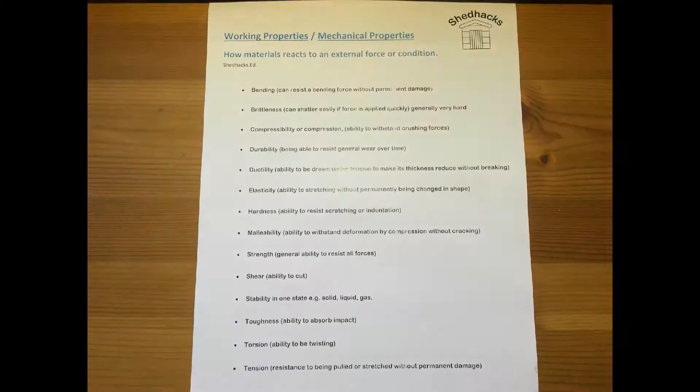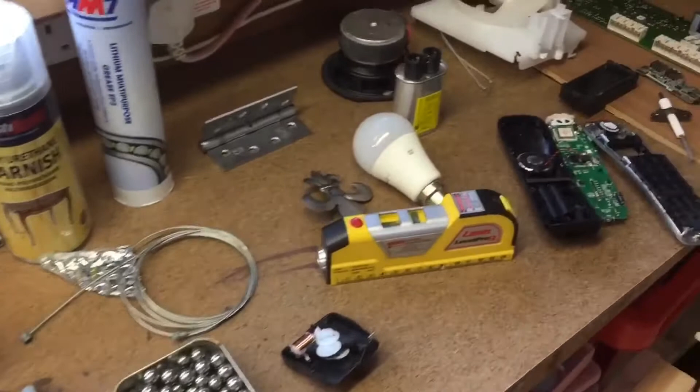In this clip we're going to be looking at these sorts of materials, and you can see a massive range of different types. Jake's going to be cutting a golf ball, melting some metal, blowing up some inner tube tyres, and melting an ice cube with fire, making custard to show you what that material is actually related to.

He's also going to be making fire from the sun, apparently, and changing the colour of plastic using UV light from the sun. On the table here, Shed Hackers, you can see some of the materials we're going to discuss in this next clip, and they're not as obvious in terms of their properties as you might imagine.

Jake, how's the golf ball cutting going? Yeah, it seems to be going all right. Oh, look, that's it. Okay, well let's have a look at it. Well, it's in two pieces now.

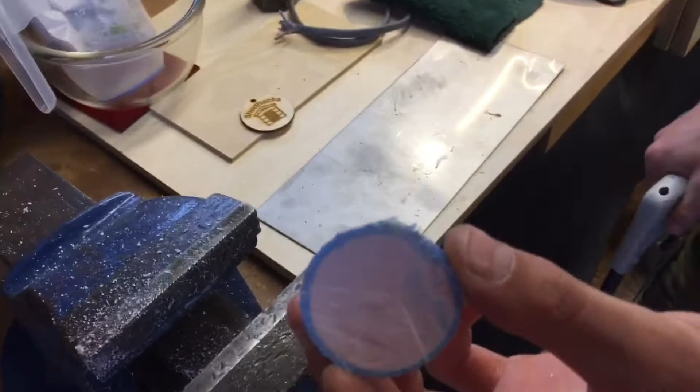Let's have a look. Do you know, years ago they used to be full of rubber bands all combined together, rolled together. And that is just a pure polymer by the looks of things. Well, there you go, Shed Hackers, that was a golf ball - just turn it, yeah, that definitely was.

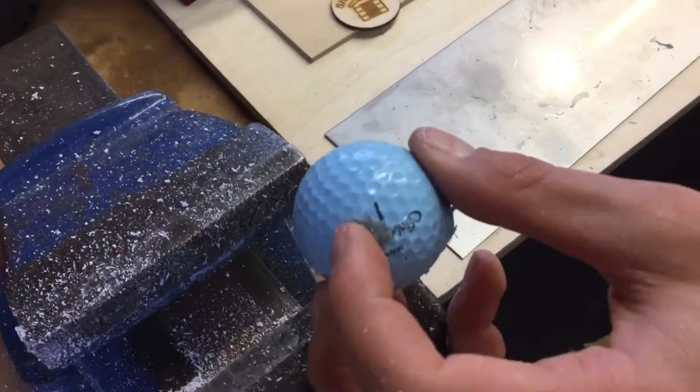Well done, Jake. Was that hard work? Yeah, it was actually. That has to take a lot of force, a lot of impact force, doesn't it? And some of the really new ones, the expensive ones, have a soft core and a harder outer shell so they can take perhaps even more impact and go further. Brilliant, that, Jake, well done.

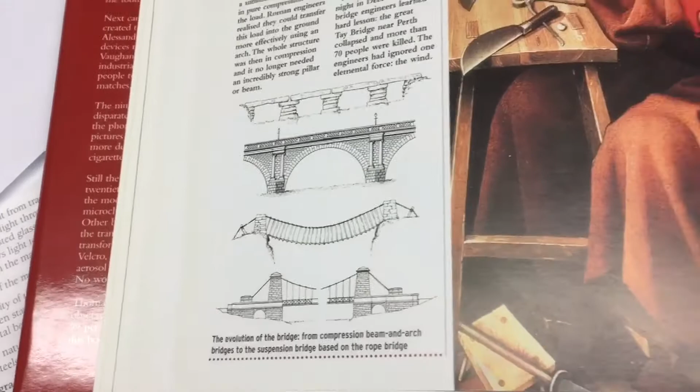How impressive. And these aqueducts here that hold water are all made from stone, but stone very carefully chosen. This page talks about how stone masonry was developed over years to make bridges, and how carpenters made things very finely using fine-edged steel and iron tools. Wasn't Jesus a carpenter? Jesus certainly was a carpenter, yes, and it makes quite a few references to that in the Bible.

But even the use of fabric has changed over the years. Looking at just the last 50 years, fabric has become quite an impressive piece of technology in itself - self-illuminating, able to insulate from heat, able to keep you very, very warm. All things that 100 years ago were virtually impossible.

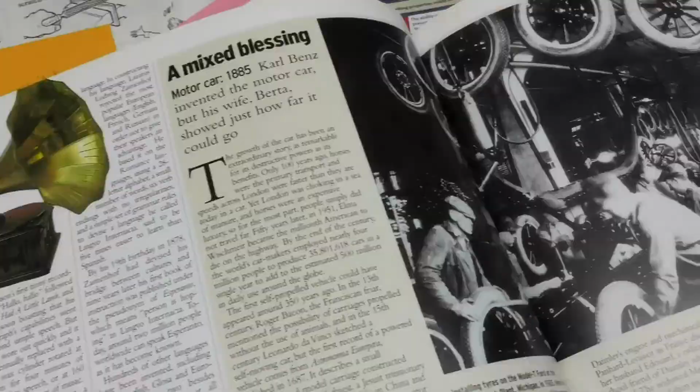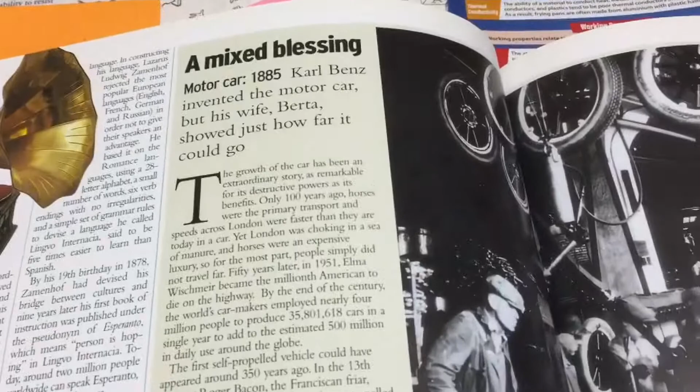Here's another interesting clip - look at the old gramophone here, that old record player. Wow, mechanical, a wind-up one, and it amplified the signal from a little needle or stylus into the cone, which amplifies the sound. And moving on a little, look at this motor car developed by Karl Benz back in 1885 - look at the old materials used, incredible. All these old technologies and old use of materials develop over the years into newer, more refined and more useful materials.

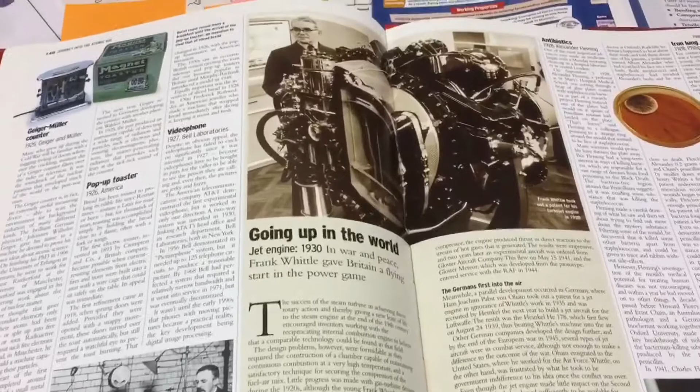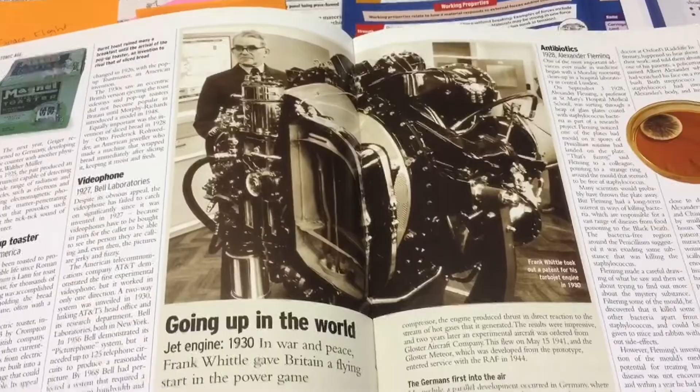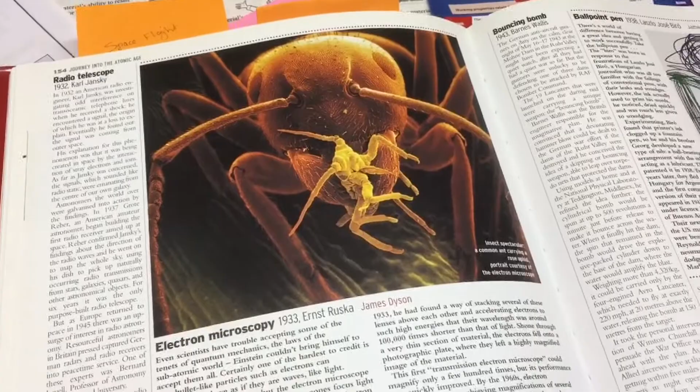And it helped enormously in the Second World War. Interestingly, this book's all about it actually. I've got some other images - I think there's one of the engine.

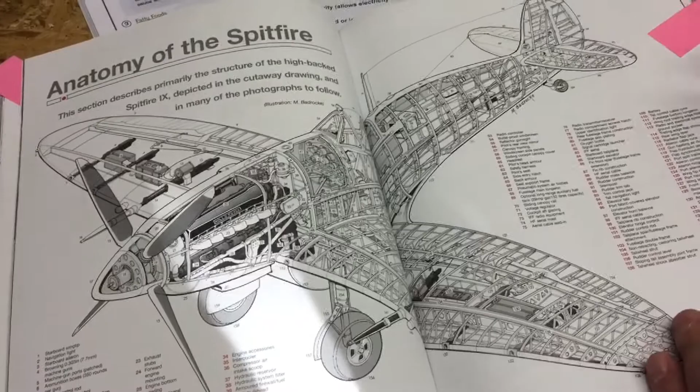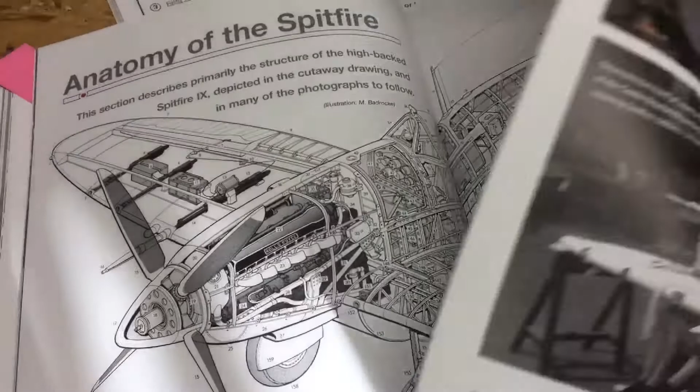Oh, there's the anatomy, they call it, of the aircraft. It shows all the various components, componentry, and the actual aeronautics, the airframe as well, how it's all put together. Amazing, isn't it? And then here it shows it being fabricated, made together.

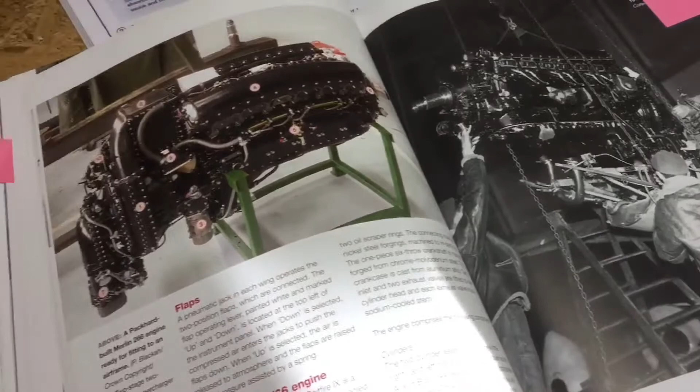And they actually did use fabric on some of these aircraft, not just metals. But wouldn't the fabric burn under the intense heat? No, it's treated - a lot of it was treated very carefully with chemicals. All part of this whole topic, really, this clip. Some of the materials they used were designed specifically to resist heat.

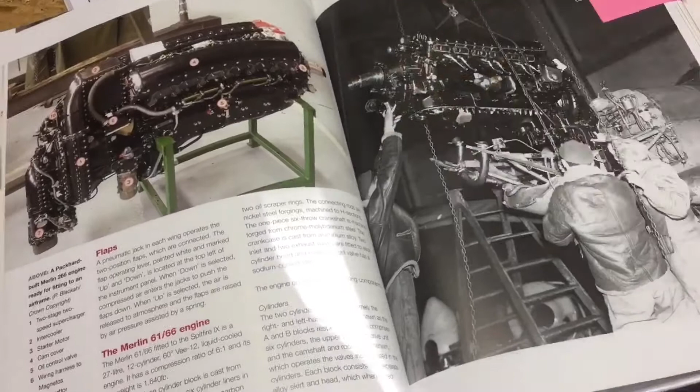And so has electronics. We're going to talk about electronic components a bit later in one of the clips, and how they've helped us in all sorts of ways, medical science in particular.

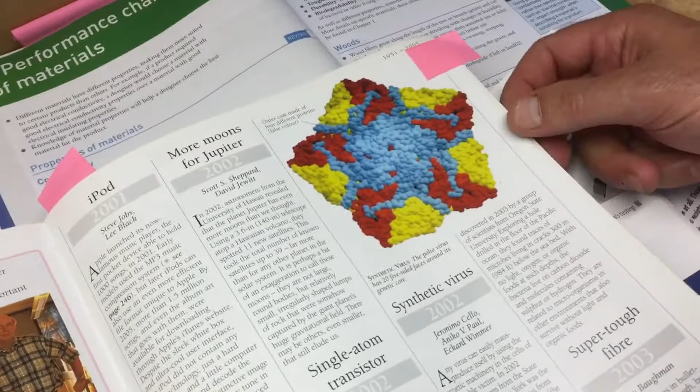Wow. Ah, yeah, genetic control. He's talked about genetic control and engineering. Very impressive. And one thing I did find out, look - this is interesting, this is at a microscopic level. That means you can't see it at all. This is the outer coating made from 4 different proteins, and they're man-made. It's a synthetic virus they've made here to counteract polio.

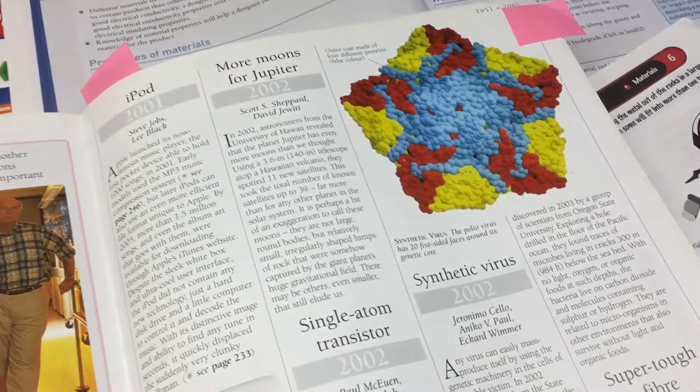That means to stop polio happening. So would they make a virus to stop another virus? They can do. And of course we're in a situation at the moment where there's viruses we really don't know enough about to stop it becoming very, very dangerous to the world. Go back to that though later perhaps.

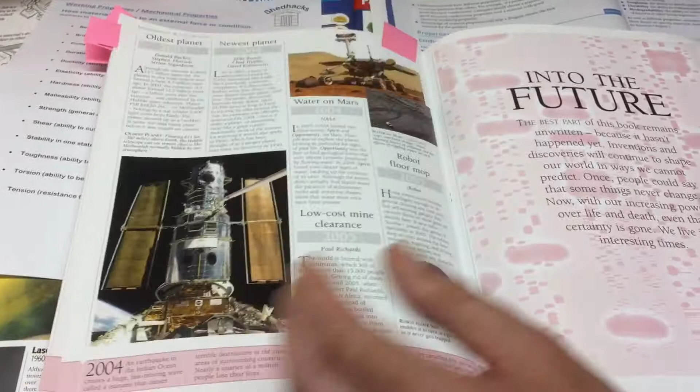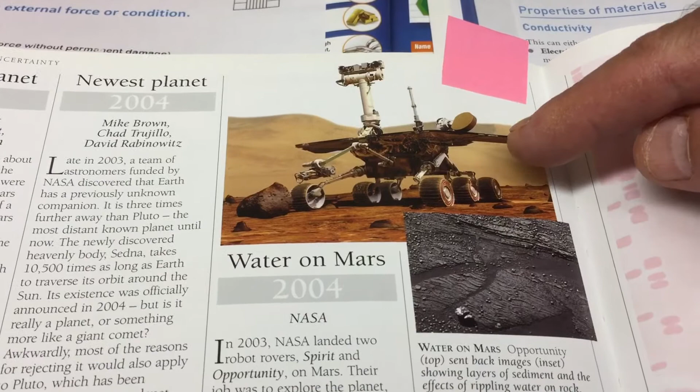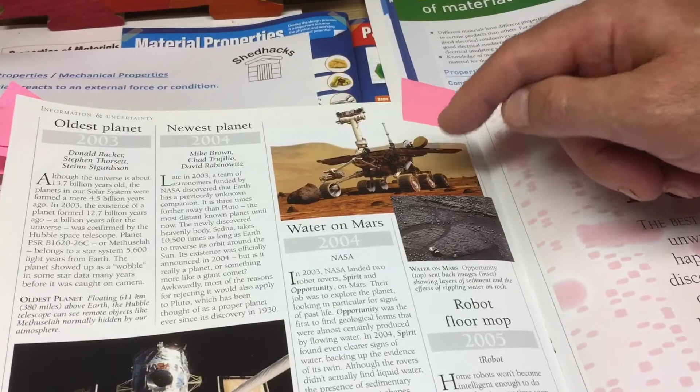Oh, there's this clip here on the Mars rover. Now that's full of very, very advanced materials. And the material science in that is something perhaps we'll touch on a bit later, but the resistance to wear and corrosion and temperature and chemicals in some of the materials used there will be very, very impressive.

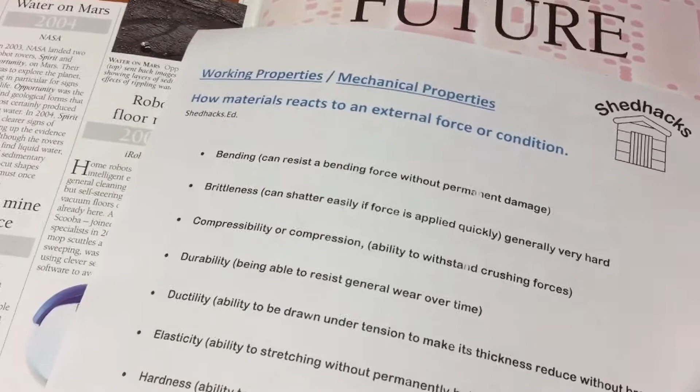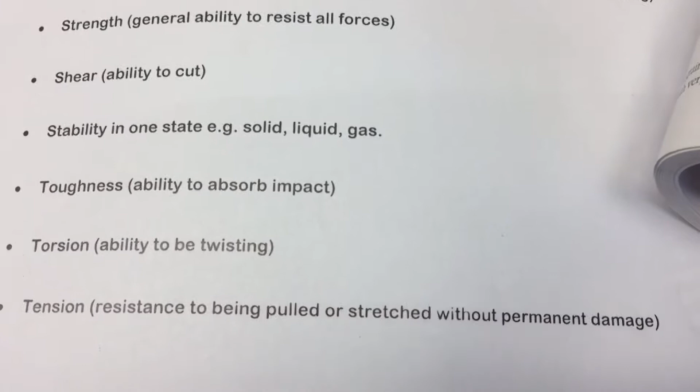Okay, we'll leave it there for a moment. When you talk about properties of materials, what do you mean? It's a good question, and I think a lot of people do find this subject quite difficult. I've printed off these worksheets and I've tried to write down what I've found from the various information and the research I've done. And here is a group of words I've tried to collect together to show the most common terms used.

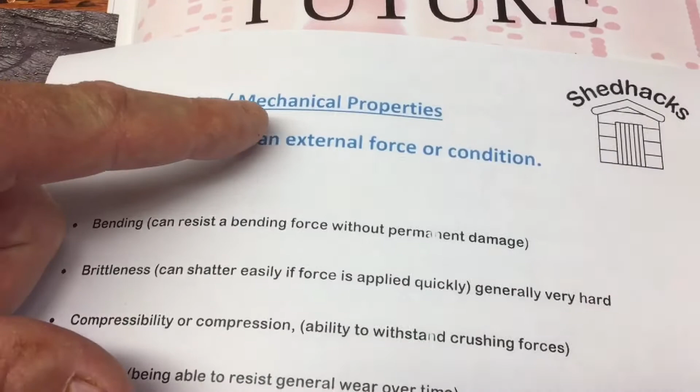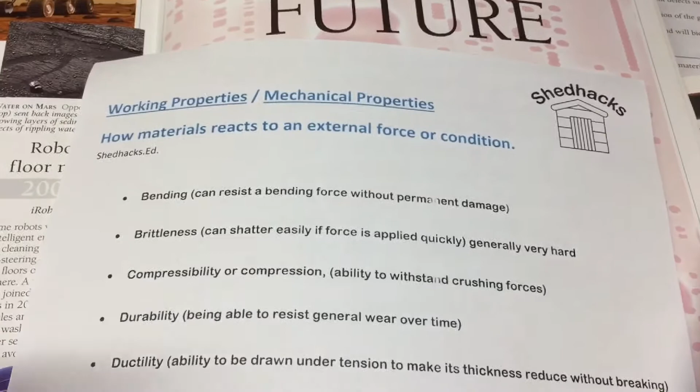And these are called working properties, and some people call them mechanical properties. What it basically means is how materials react to an external force or condition - I suppose in some ways to the environment they're in. And that's really critical about the design and use of certain materials.

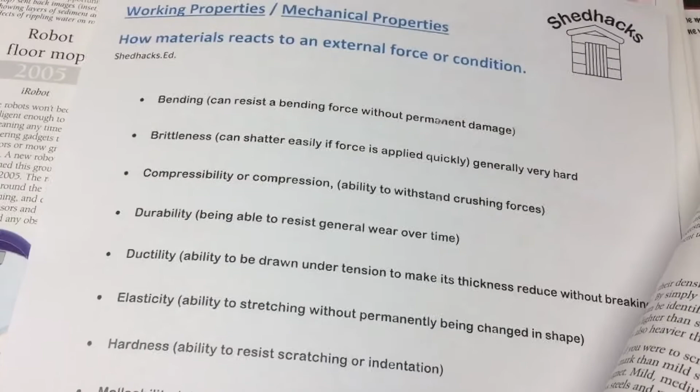Compression is a really interesting topic. Can you think of one piece of material that you know of that's really good in compression? It can take a lot of compression. Concrete?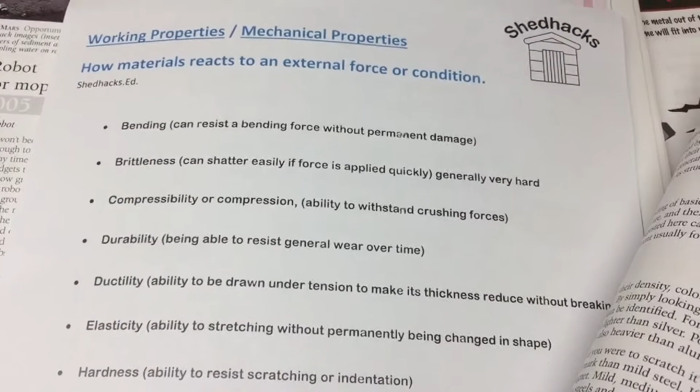Concrete is used extensively in house foundations and all sorts of structures, bridge structures, because it can take enormous amounts of crushing forces.

Moving on a little bit, durability is a general term, meaning resistance against wear over time.

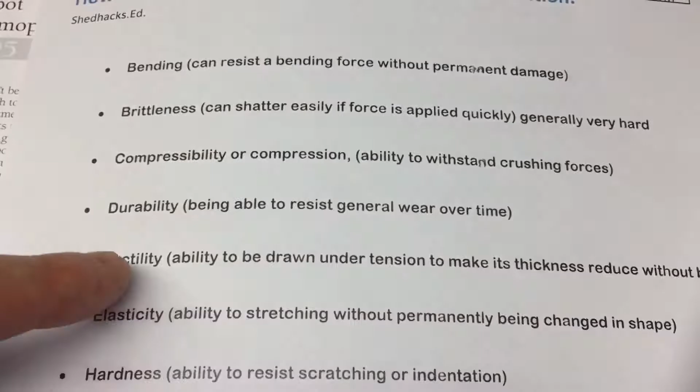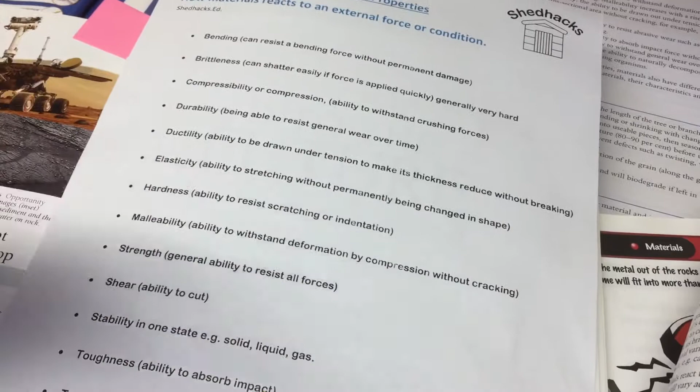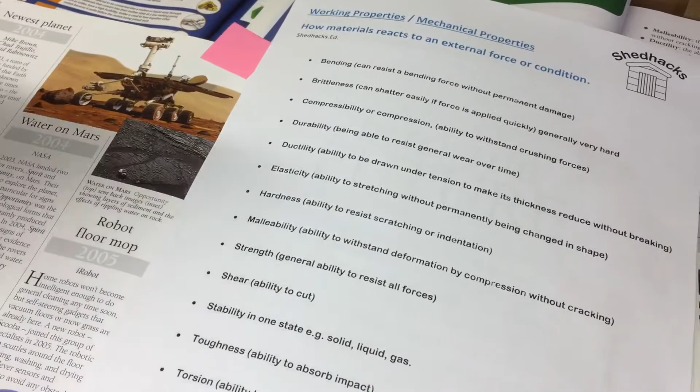So what's ductility? Ductility is the ability to be stretched and drawn under tension, when the thickness can still reduce, but it doesn't break. It's a hard one to explain, but with aluminium you can actually stretch it and it will become thinner, but it won't break until it gets to a certain point called its yield point. Perhaps we'll touch on that a bit later.

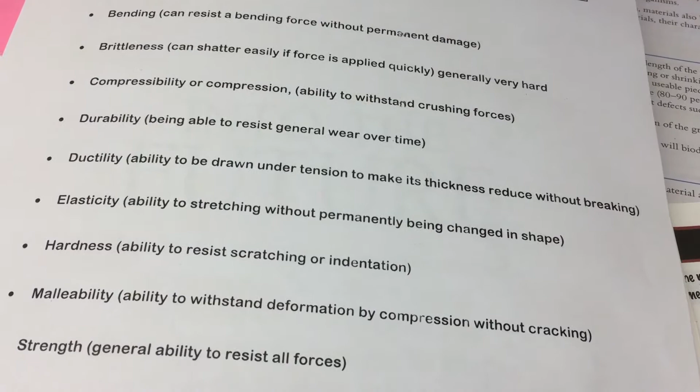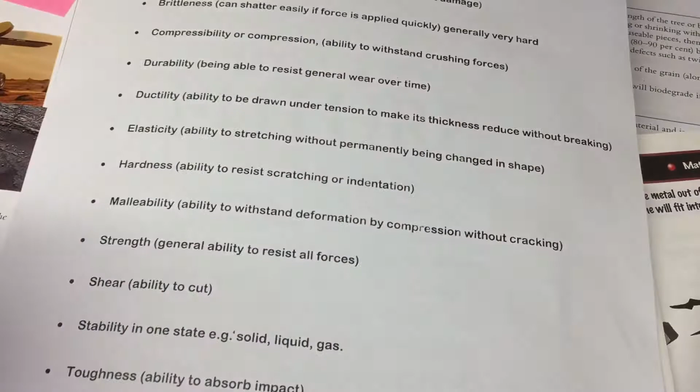Okay, and then elasticity, that's a little bit easier to explain. An elastic band is an example of elasticity, and anything which has the ability to stretch is known to be elastic in some way. It's connected with another word called plastic, which is also used in connection with elasticity - the ability to stretch without permanently changing its shape.

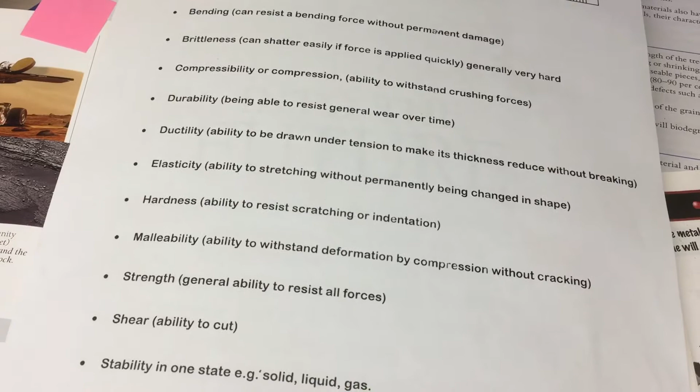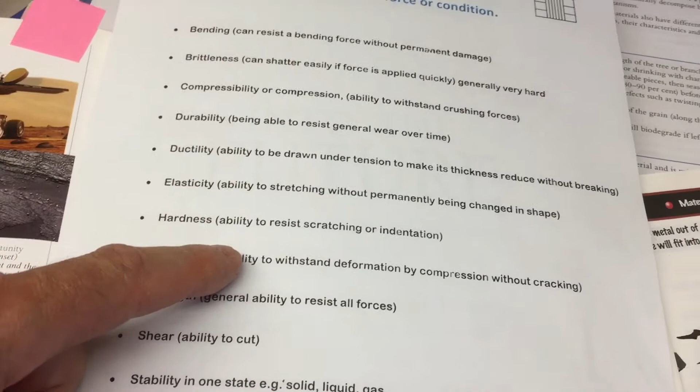So there you go, hardness. Can you explain hardness, Jake? Would it be the ability to resist scratching? Yeah, so if you try to scratch some metals and glass, they're so tough and resilient they don't scratch very easily, and that's a sign of hardness. The test for hardness often uses a very hard material such as a diamond, and they actually score it and see how easily it scratches or indents.

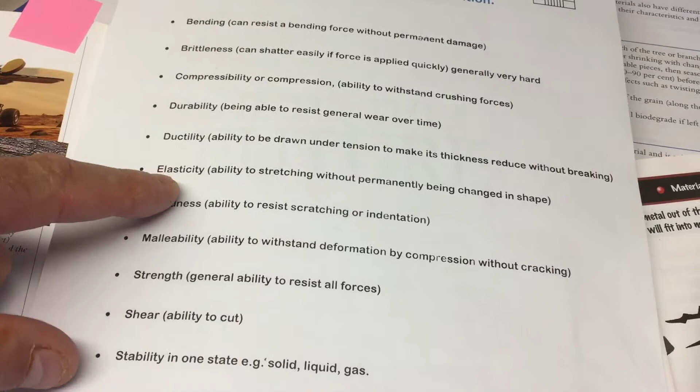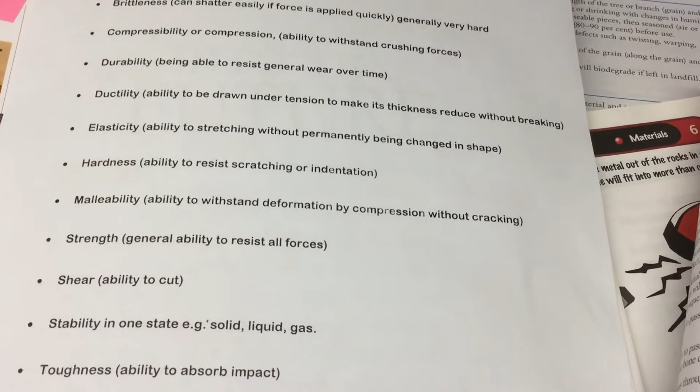Okay, that's hardness. Malleability is the ability to withstand deformation, or deformation by compression, without cracking. Another hard one to explain, and perhaps we'll touch on that a little bit later - that's malleability.

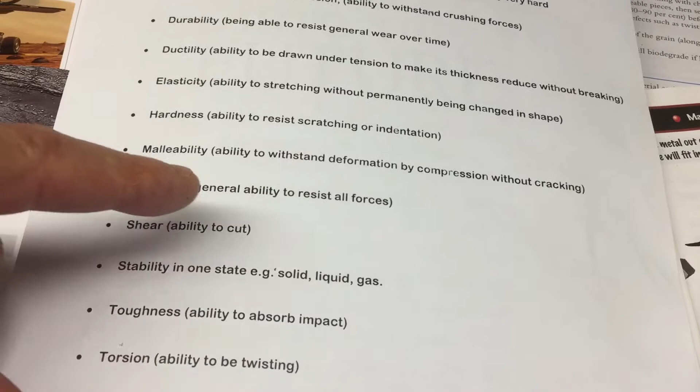Strength, a general point, is resistance to all sorts of forces, a little bit connected to toughness. So strength is a general term, okay.

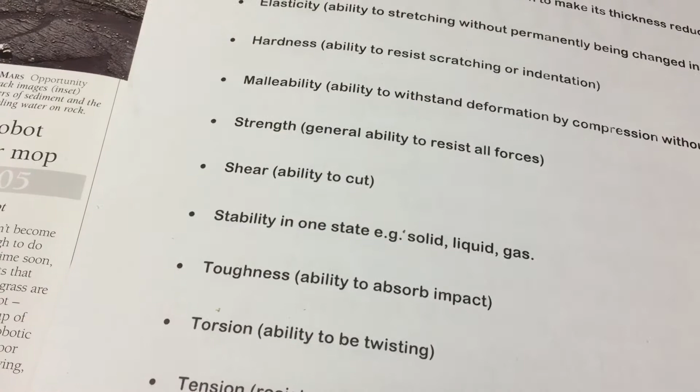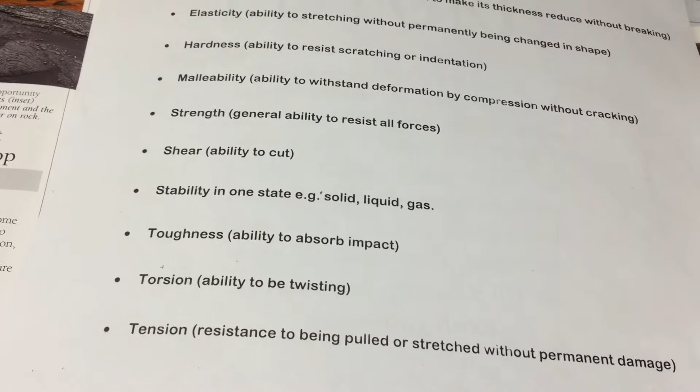Shear, well that's the ability to resist cutting. Paper is very poor in shear because you can cut it very easily, but you can't cut metal very easily, and you can't cut diamonds very easily. Shear is the ability for it to be easily cut.

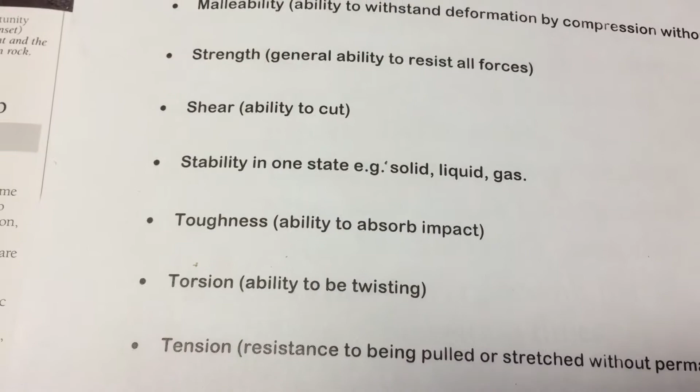Stability really relates to the product or material not changing from one state to another at a given temperature. Some materials are actually very unstable, and they can suddenly change to a liquid or a gas, even with just a couple of degrees change in temperature.

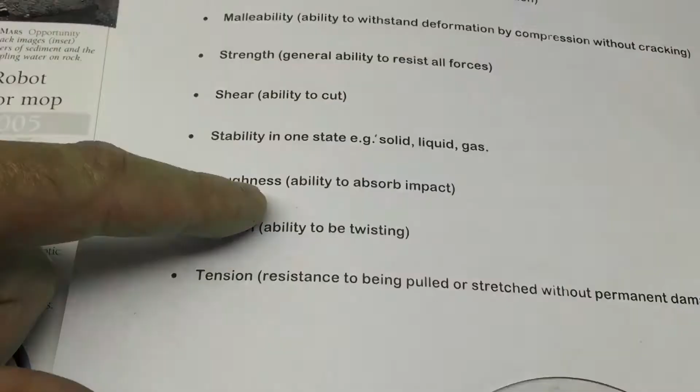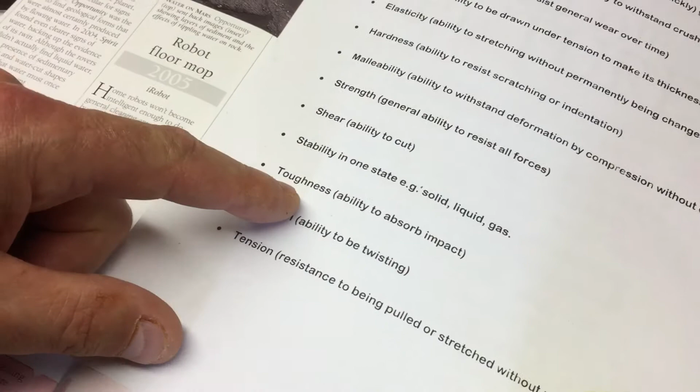Hi guys, and in today's clip we're going to be breaking some materials to test them for toughness and impact strength. So that was the end of the test, and we're going to take you through all the items we broke, and we're going to break one final product, not just one material. What do you think that's going to be, Jake? My phone! No, not your phone - it's an iPhone. So what's toughness? Toughness, there's the spelling, it's the ability to absorb impact.

So I suppose a tennis ball can do that - it can take impact time and time again, and it won't break or crack. So what about a spring? Yes, to a point. I'll give you an example of a spring. Here's a spring - it is tough, but it's not a really good example. If you stretch it, it will return back to its original shape. But if you stretch it to a certain point, the elastic limit if you like, it's called, it then stays the same shape as you've pulled it apart from.

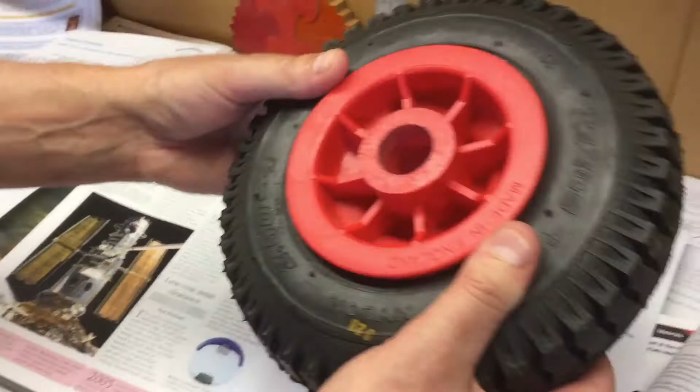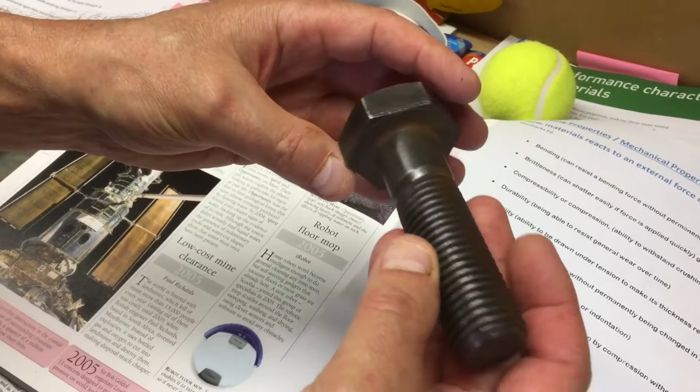Okay, so I think a good example of toughness really is maybe something like this - really resilient to wear, both the tyre and the actual wheel hub, very tough and strong. And a bolt, I suppose, is tough and strong and can take a lot of force from all sorts of angles - pulling and crushing force, and torsional force, twisting force as well. That's a good example, does that help?

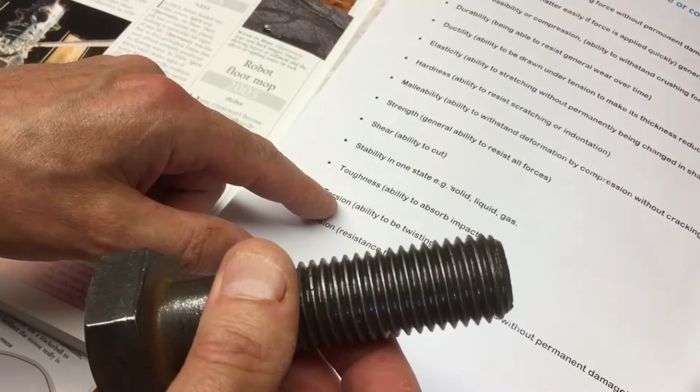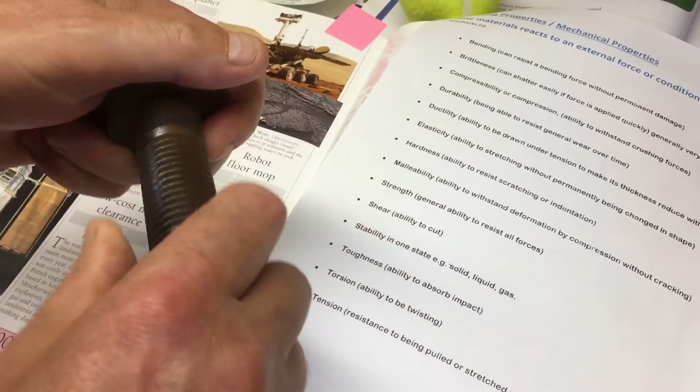Yeah, so torsion, that's actually a good one, because it moves on to torsion. Torsion is the ability of a product to be able to be twisted without it actually being damaged. Steel is a good example - you can tighten a nut on this, tighten it very, very tightly, and it really won't try and twist itself, unless obviously you overload it.

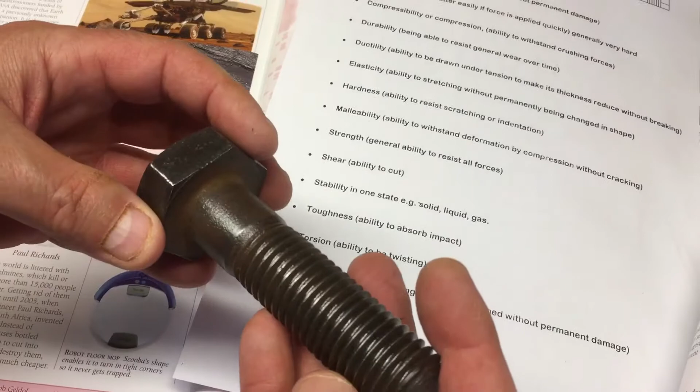They can take hundreds of tons of force in a twisting motion, some of these large nuts and bolts. They're often used in car suspension as a way of supporting the car, a certain method called a torsion bar.

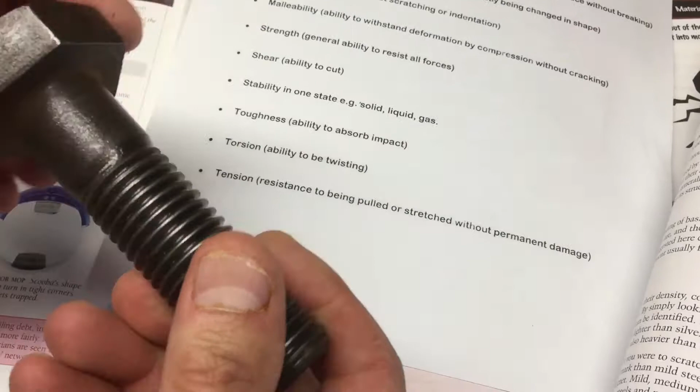And lastly, tension. That's resistance to being pulled or stretched without permanent damage. I think that's an easy one to demonstrate.

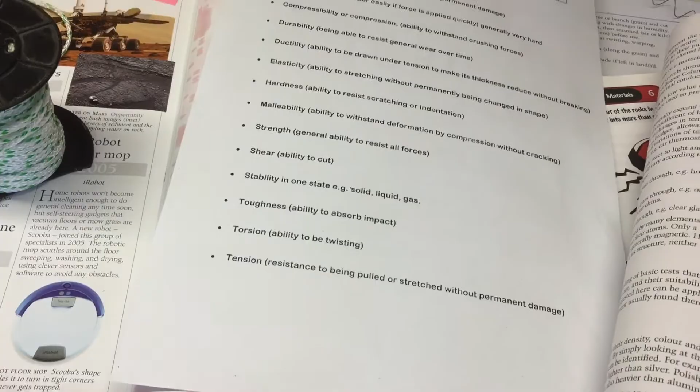The demonstration would be a piece of string, and you see these on very large boats, don't you? Nylon cord, and you see metal wire used on bicycles. But on a crane, you'll see one that's literally that wide, solid, almost solid metal, but it'll be woven together into a steel cable, and they can take enormous amounts of tension.

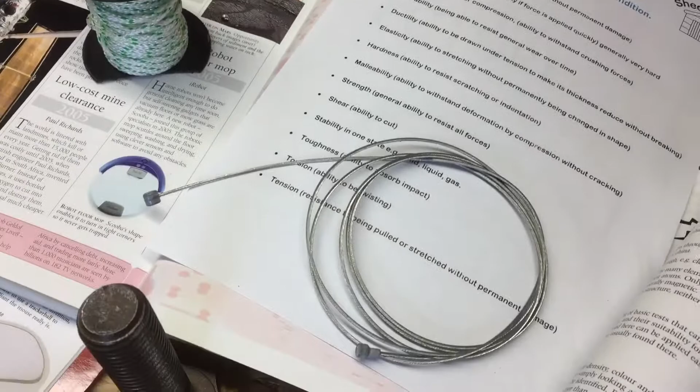Can you think of anything else that takes tension? What about a cord from a fishing rod or a strimmer? Oh, I can take it, yeah, lots of pulling force. I couldn't break that. You could probably pull a car along with that thin cord. Amazing, okay, we'll leave it there then.

So, what are you doing? Ah, hi Jake.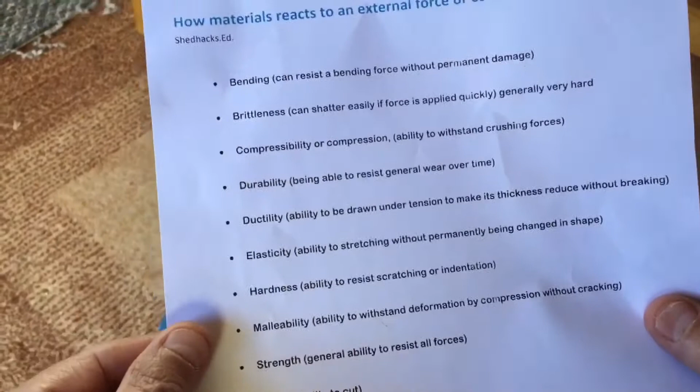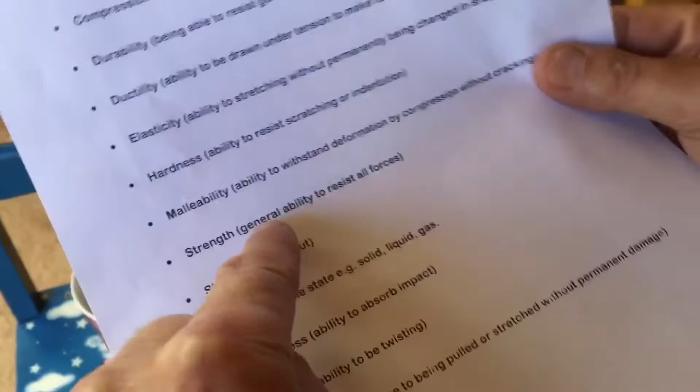I'm going to do some destructive testing on some materials, just to liven things up a little bit for our viewers. I thought we'd start on looking at brittleness, durability, strength, which is the general ability to resist all forces, a little bit on stability I suppose in some way, but certainly toughness - that's going to be our key area for the next few clips. I hope, shed hackers, you stay with us and enjoy this. Jake's going to be breaking a few items.

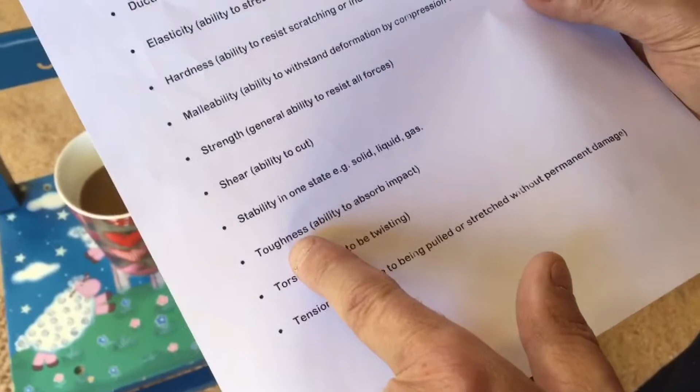The house tile. Ooh, broken. Oh, it's broken. Too, oh, that broke easily. Cardboard box. Oh, it's quite hard, quite tough.

Can't really crack that one, can you? The glass mirror. Oh, wow. The ceramic plate. Aluminium nail. And again.

Now the light bulb. Now the polypropylene pig. Now the steel can. Now the lead pellets.

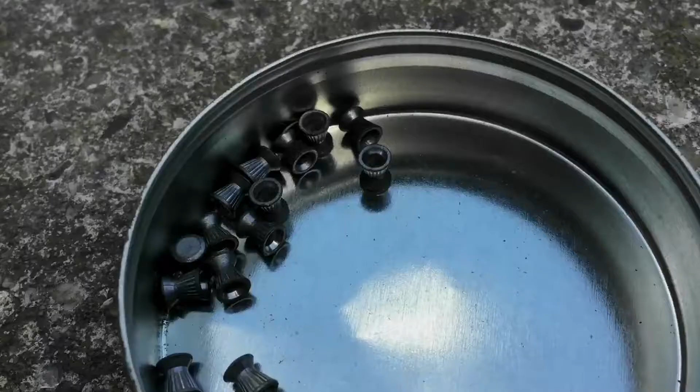Now the polymerized rubber. Oh! Very resistant. And again. Well done, rubber. Now the polyethylene propeller blade.

In small quantities it's much weaker. Handle grip, we think is a polybutylene or some type of silicone rubber. We're not sure, maybe. Off you go, Jake.

So that's very tough and resilient. Well done. This is a house brick made from clay. Oh, very brittle - could take a lot of compression, but not an impact force.

Markings there, Jake, what is this? Polyethylene, so it's a type of plastic. So, destruct.

What's this one? Polyvinyl chloride - and what is it? It's a piece of rainwater pipe. Yes, okay, you may have to hold one end to crush it. Or, yeah, don't know. Hold one end, that's it.

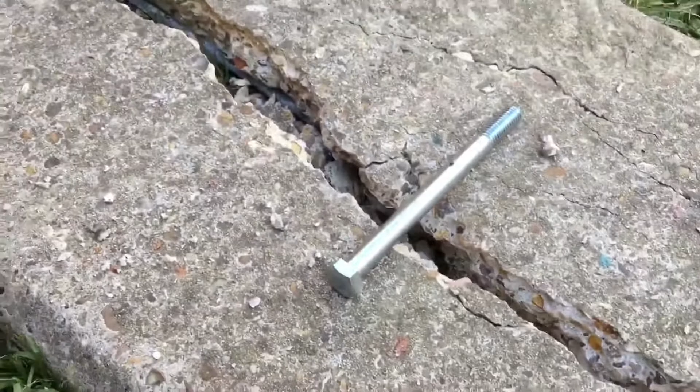That was putting on a lot of hammer. Do another big hammer job. Right, that's gone, but you know, it's still very, very tough. Look how thin it is really - so very tough. Steel, that is. Yeah, steel bar - I think it's electroplated to stop it rusting.

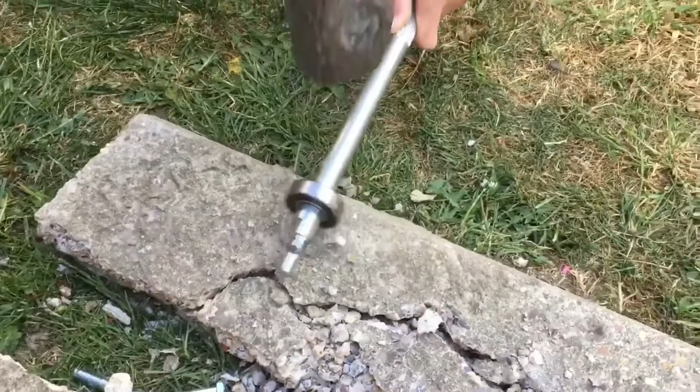Right, ball race in a bar - I don't want this to flip in my face, so carefully, Jake, on this one. Oh my god, hold the end - I think you're not going to be able to break it, maybe you might crack it. It's quite a brittle metal.

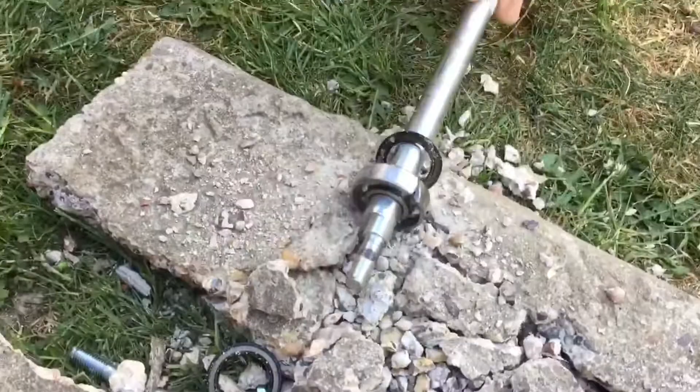Keep going, keep going - oh, you've broken the concrete now. Keep going, keep going. Right, let's just stop there, let's have a look. Is it broken? Yeah, it has cracked, so that's a brittle metal - brittle steel. It'll be some sort of tool type steel, but it's high carbon steel.

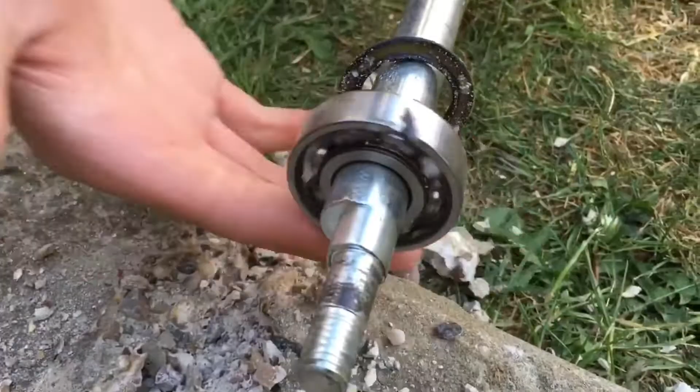But the bearings are still in place there. Yeah, isn't it? And look, it still runs actually - that's quite amazing. Is it really? Yeah, it runs quite smoothly. That's absolutely amazing. Well done, Jay.

Jay, what do you think of this destructive testing we're doing today? Well, it's very fun. And what are we doing lastly? The ball bearing - now there's the ball bearing, guys, and we know there were ball bearings inside there somewhere.

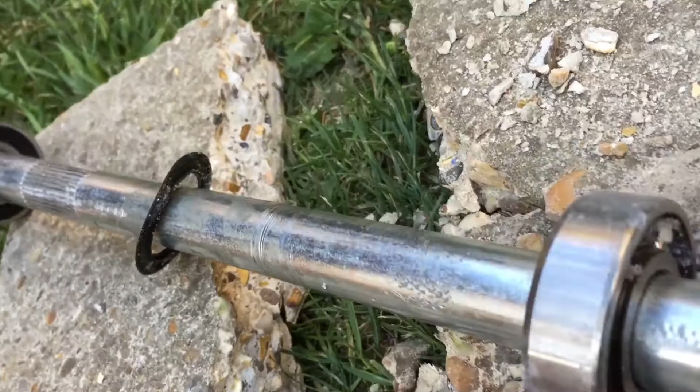If I can get it - I think the cage is going slightly... snapped, but right, looks like an explosion's happened here. Right, let's go for the ball bearing. I have to move the camera back a little bit. Go. Oh, put it back on. That's it, another one. Oh dear, oh gosh, this isn't good.

Right, can you see the hole it's left in the slab? Give it another bash, see if you can get it. Right, okay, that is the toughest of the lot. Well, we think so - ball bearing, and it'll be made from a high carbon steel.

And yeah, that's - so we've had a bit of fun today. What do you think you've learned from today's test? That in this test with the impact, the steel is the strongest because it's got a high enough carbon content to make it hard wearing, tough, but not too high where it will just shatter. Great, and of course the other materials we discovered, although they can't take impact, they're all designed for specific purposes, so they have their own qualities, and that's why the material properties of each of those materials is so important.